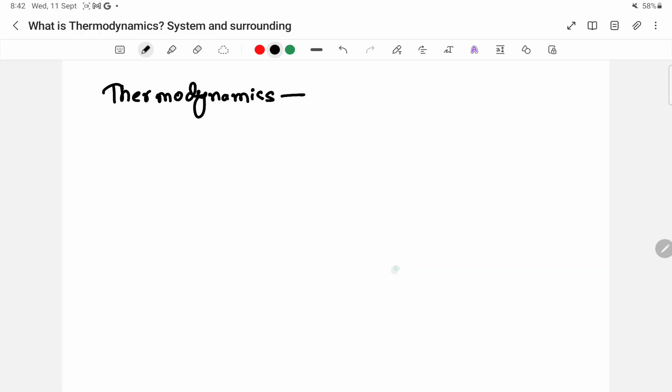So what is thermodynamics? If you want to say, it is the science of energy transfer and its effects on properties of system. We'll study what is system and surrounding in this video, and also properties of a system in our upcoming videos. So you can see it is the science of energy transfer.

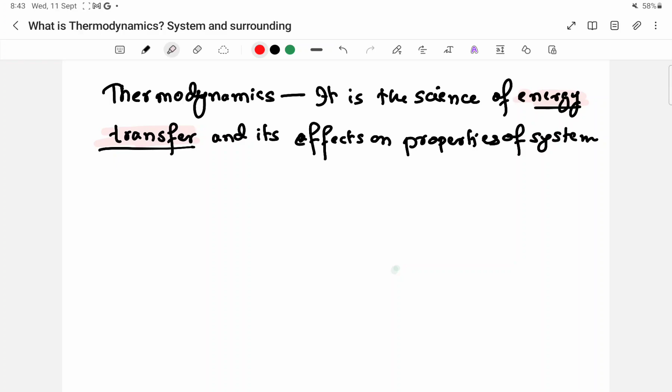Okay, so we are talking about energy transfer. So energy can be both heat and work. Let me write it down. So your energy, either it can be heat or it can be work. Heat is a disorganized form of energy. We'll learn later on why it is disorganized, and work is the organized form of energy.

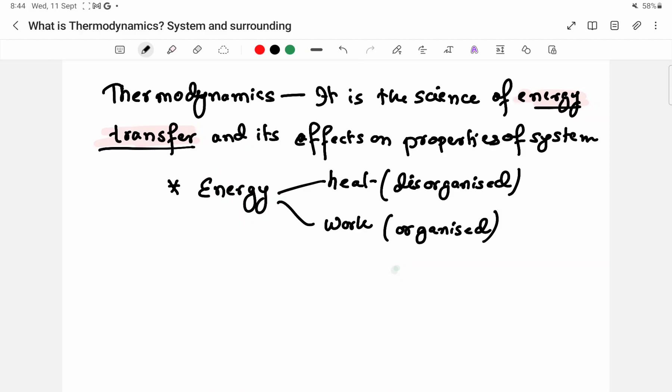So we are dealing with heat and work, and this energy transfer affecting the properties of system is what we study in thermodynamics. Okay, so what is system? It is a region in space upon which the study is focused.

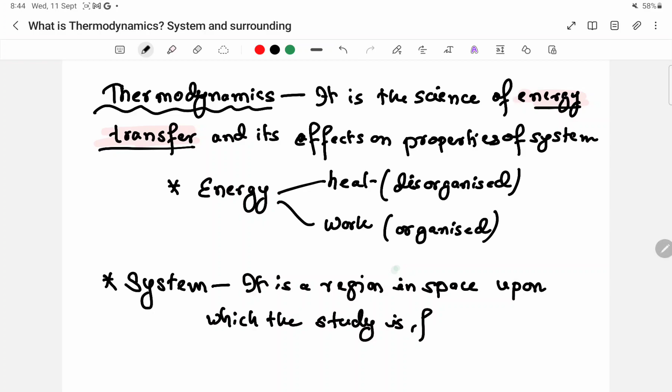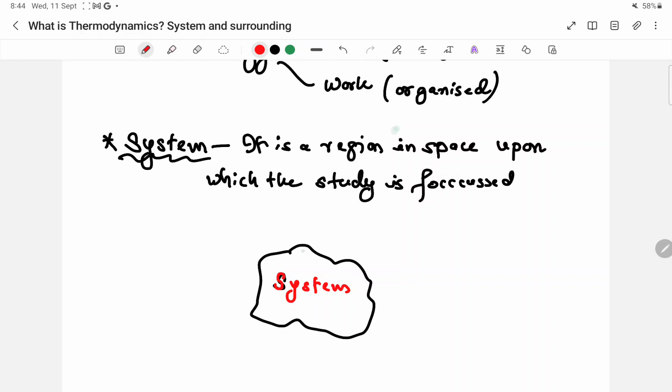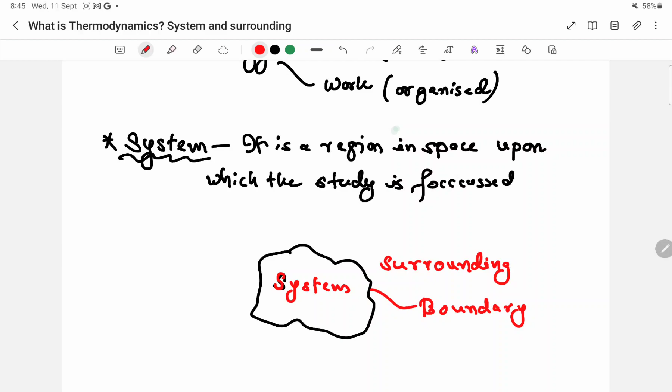Let me draw it and then you'll get to know. Suppose this is our system. Where we are focusing the study is the system, and where we are not focusing is the surrounding. The border between the system and surrounding is called the boundary. The entire thing, system and surrounding, is called universe.

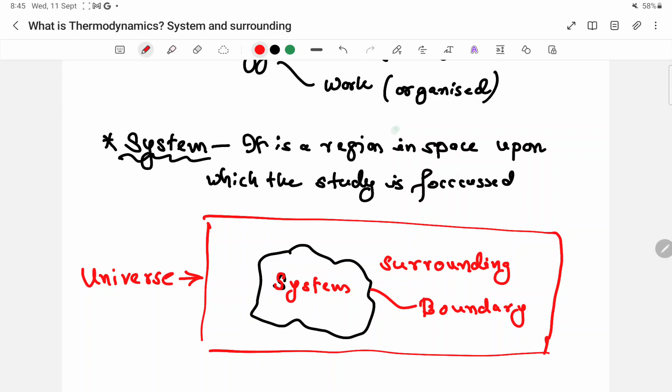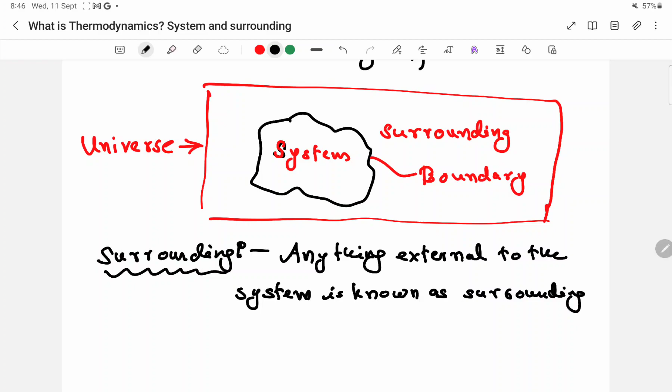So if I ask you what is surrounding, what will be your answer? Anything that is outside the system or external to the system is known as surrounding. And your system and surrounding combined, that's why I'm using the plus, is your universe.

Now this boundary can be movable or fixed. We'll see in control volume and control mass why it is movable or fixed or rigid. Okay, so this is all about what is thermodynamics and system and surrounding.

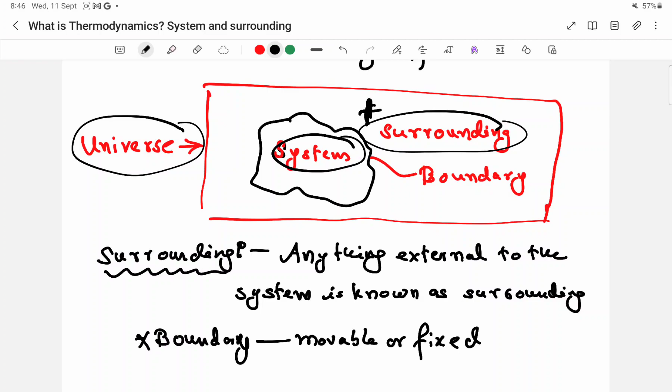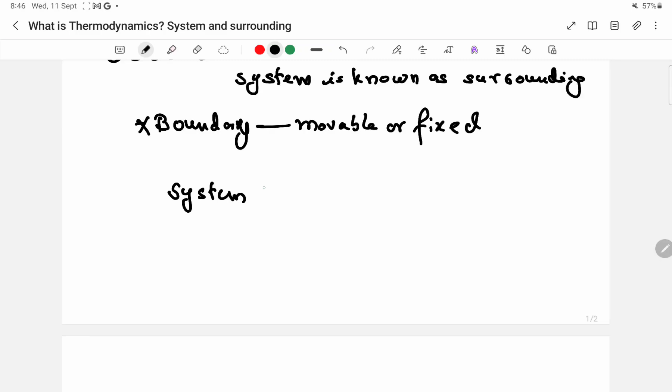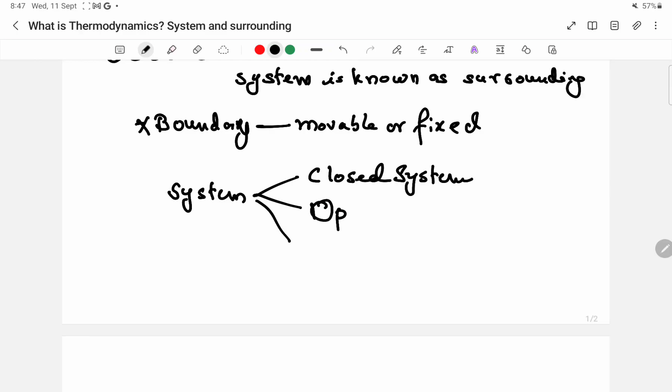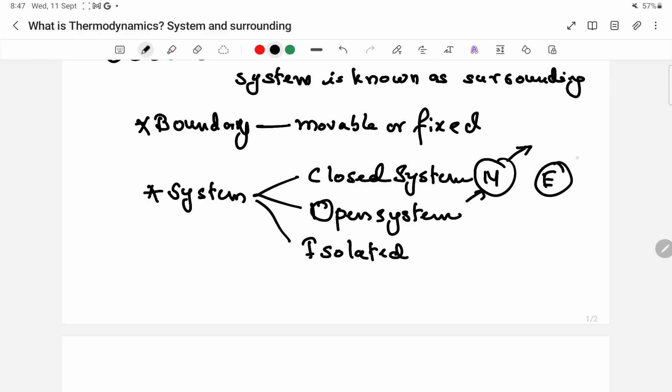And if you go further, we'll get to know that system is of three types: closed system, open system, and isolated system. We'll study it further with control volume, but let me shorten it up. In closed system, the mass cannot go in and out, but energy can go in and out.

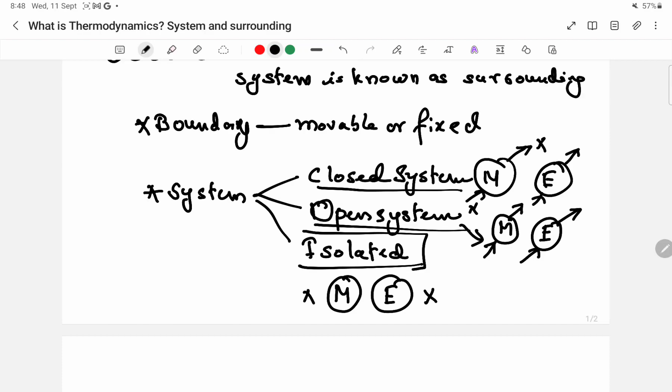In open system, both mass and energy can go in and go out, but in closed system only energy transfer is possible. And in isolated system, neither mass nor energy can be transferred. We'll study this deeply in the next video. So we are done with what is thermodynamics and system and surrounding.